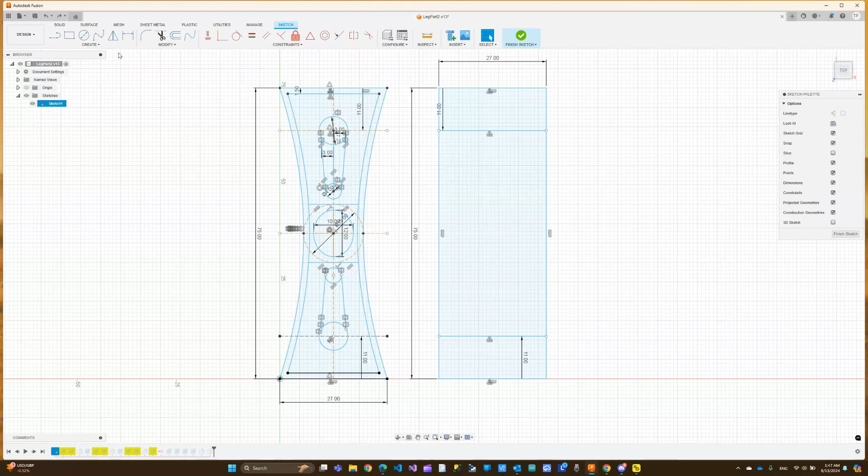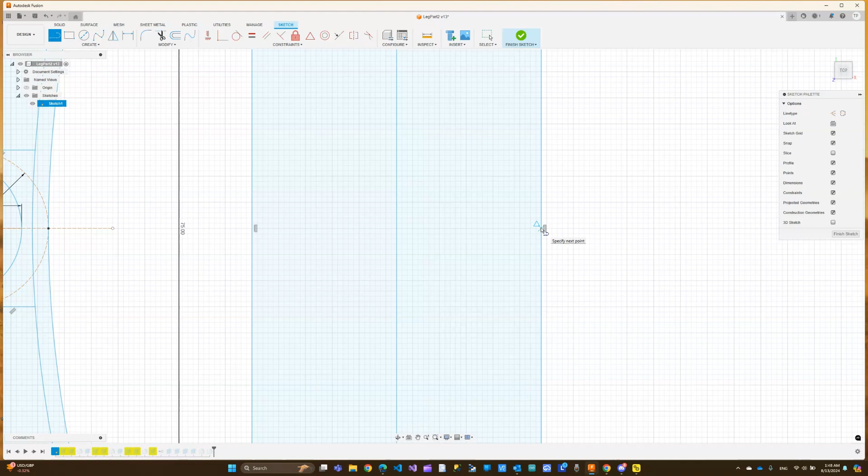So I'm going to get a line and find the middle from here to down. When you go over the line—let me zoom in so you can see better—when you see that triangle show up, that means this is the middle. I'm going to click here and drag it across, and as you can see, I am keeping the 90-degree angle to the other middle.

Now I can go ahead and delete my sides. All these additional lines that we just added are going to be construction lines. I'm going to highlight all these, holding control on my keyboard, and select all of them except the original one for the rectangle, and choose construction line from here. So now these are construction lines. I can use them for reference only, and I don't really need them to be part of my sketch.

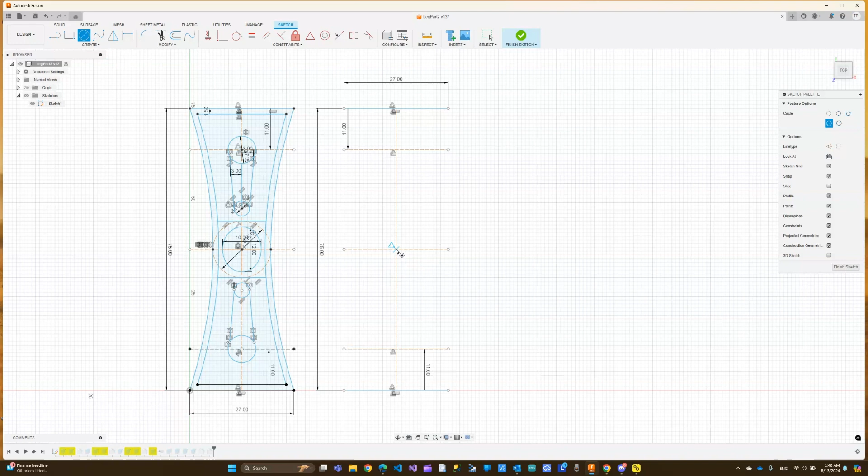Now to the next piece, we are going to add a circle right here in the middle, and this will be a 15 diameter. Now, this circle is also a construction line, so I'm going to highlight this as construction because I only need it to connect these two parts.

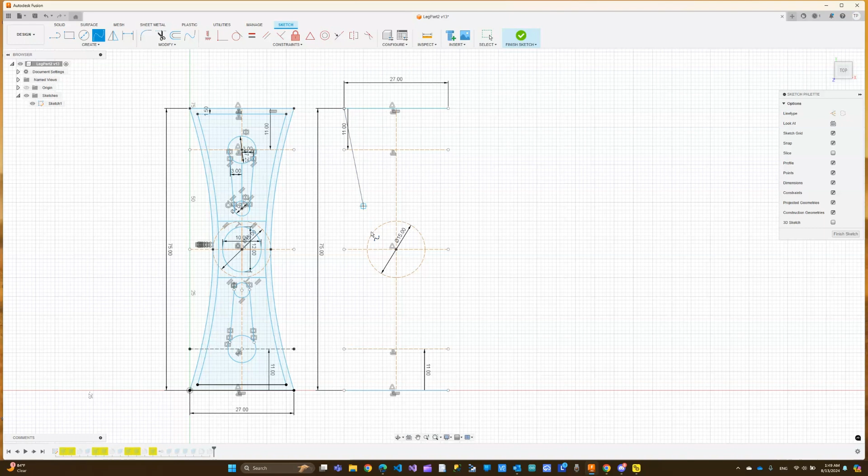Now I'm going to get the spline tools, and here I'm going to start from the top, hit the circle in the middle here in the cross, and go down to the bottom and click OK or click Enter. Now I need another spline from over here, hit the circle, then go to the end. Click OK for that. Now we will offset the entire shape.

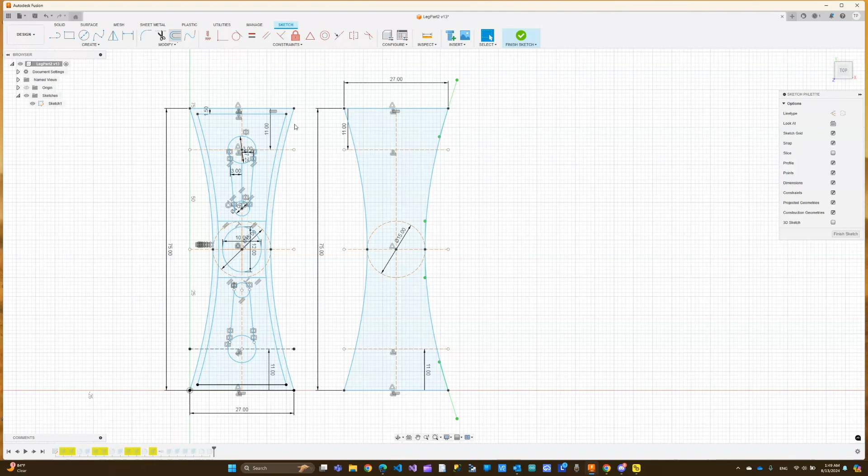So I'm going to control-click offset, and then I will select the whole thing. And now I can do 1.5 to the inside, so we will want to offset to the inside of our shape. Click OK, and that's what we should end up with.

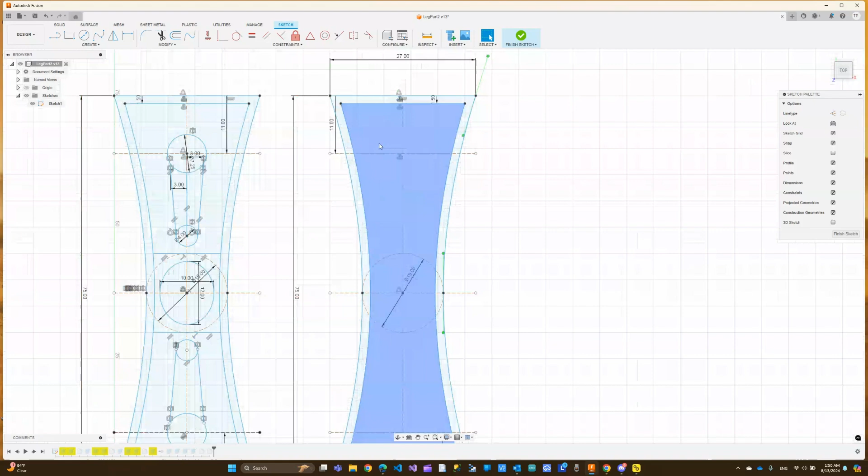Now here we will zoom in a little bit, and I'm going to add a circle over here, and this circle is going to be 7.25. This diameter is very important that you get it right because this is going to be for the servo head, and that's where the servo is going to fit in.

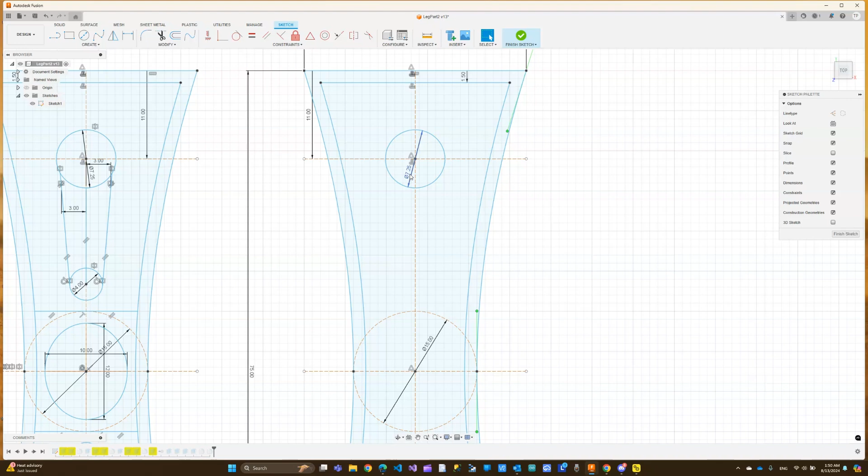So now I'm going to click OK, and you can see here from the circle, from the bottom line, I'm going to get a line. This is also going to be a construction line, and I'm going to take it from here all the way down, and go down by 12.

So here is my other point, and this is a construction line because I want another circle, and I will do the center of that circle towards the end of that 12-point line, and this circle is going to be 4.

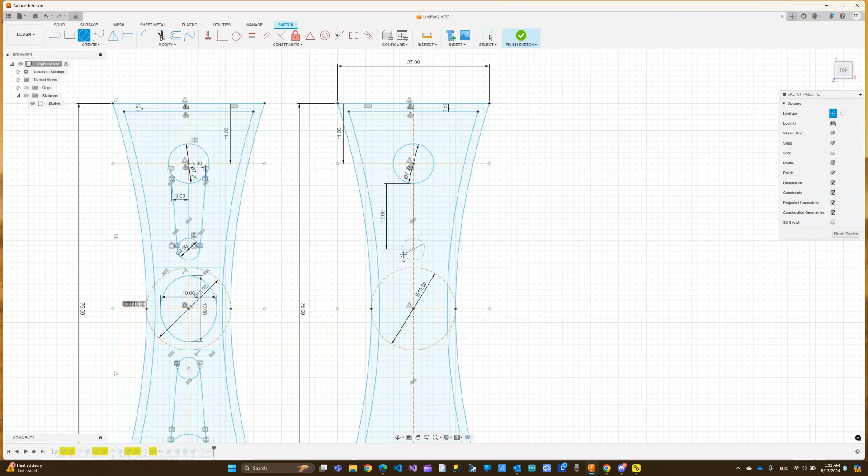So this is not a construction, so I'm going to highlight this and make it a regular line. Let me just undo that. And that is a regular circle. So by clicking that construction, we will undo it that way.

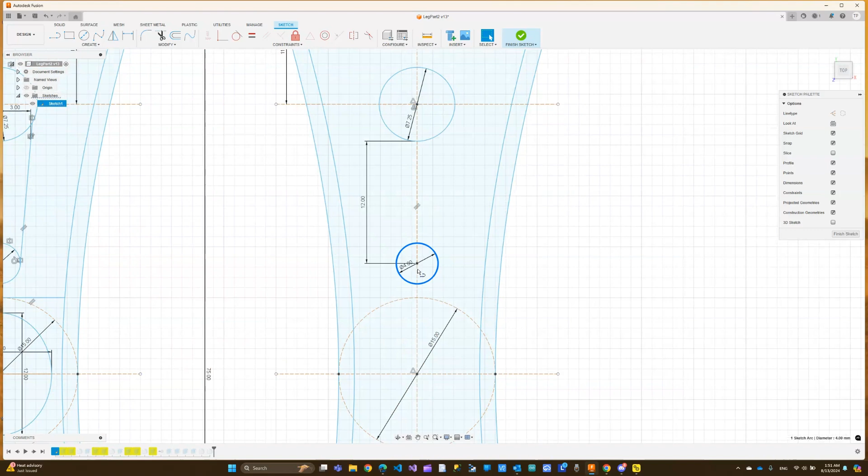Now we need one more thing here. So we have our 4. What I'm going to do, I need a line first that goes from the middle here and goes across, and let's touch here—that's not a problem. And then another line that goes from here to over here.

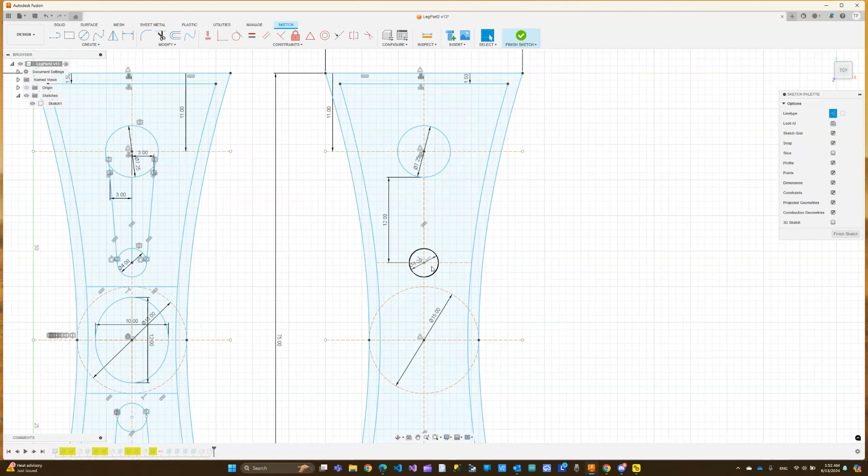By the way, these lines can be constructions because I don't really need them for the purpose of my drawing here, so the sketch doesn't really need them—this is just construction lines. And same thing over here, I'm going to add another construction line, and this one is going to be 3. Another one over here, and that is going to be 3.

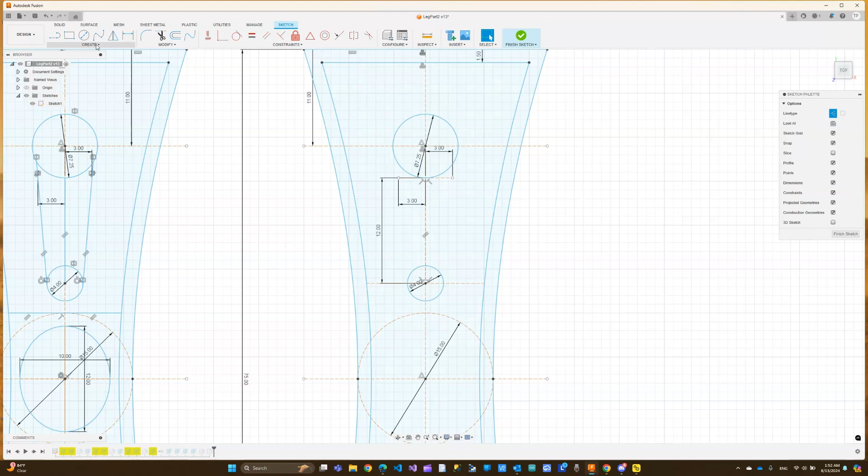So what I'm trying to draw is that servo attachment, and I want a nice hole or engraving in the material for that servo attachment. Now we are going to grab a line, let me zoom in a little bit more, and we will go from here all the way to over here.

This line is not a construction. Let me make another one. I will remove the construction in a second. Let me select this line and say this is not a construction line. This other one here is also not a construction line.

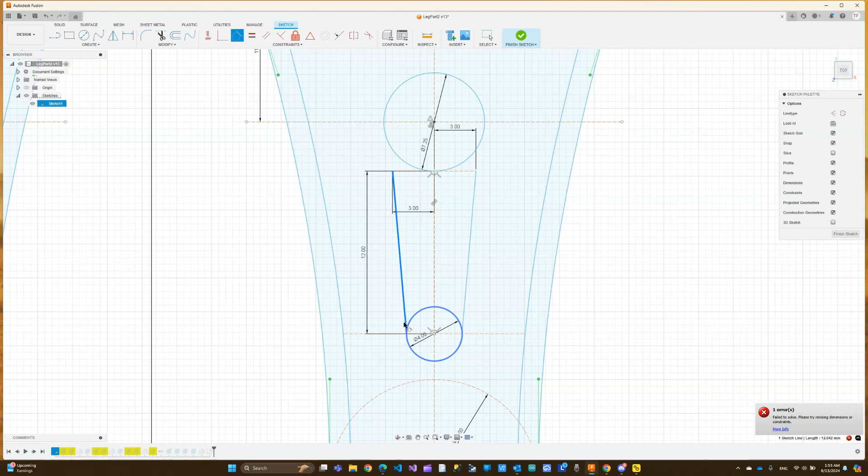Now we need to make sure these lines are tangent. See here, under constraints we have this tangent, we're going to select that, then select our circle and our line over here, and that should apply. I believe it's complaining just because it's already constrained correctly, so we don't need to do that. Let me skip out of that.

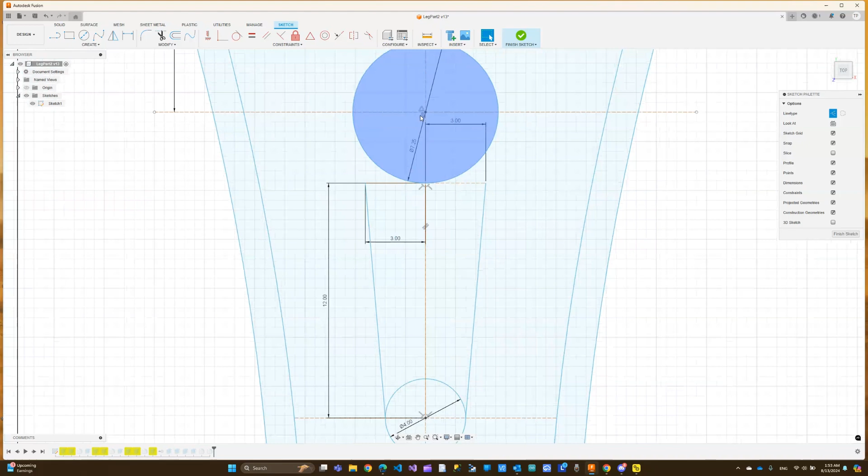What I really want to do here is get another line. We'll start here and go in parallel. You see this parallel signal showing up. We're going to keep that in parallel, and then we will touch our top circle over here. Make sure that is parallel. We will do another line over here.

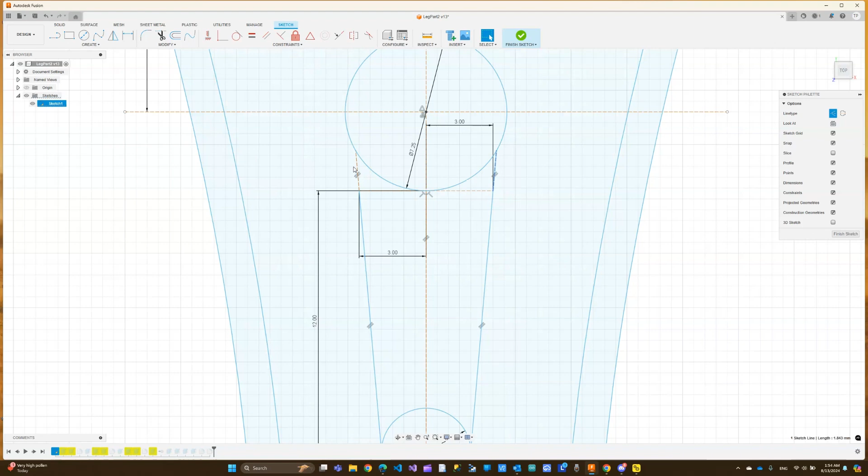These are also not constructions, so I need to undo the construction thing. You can see here, keep the parallel signal, and if I go away the parallel signal goes away. So here's what I want: this parallel signal, and then we will touch this circle. Now let me select this line, hold my control key on the keyboard, select the other line, and remove the construction here. So now I'm done with the attachment here.

I'm going to mirror this section to the other side, so we can also learn how to mirror things. I think I've done a video specific just for mirror, but here is the mirror tool. I'm going to click that, and now I'm going to select what I want to mirror.

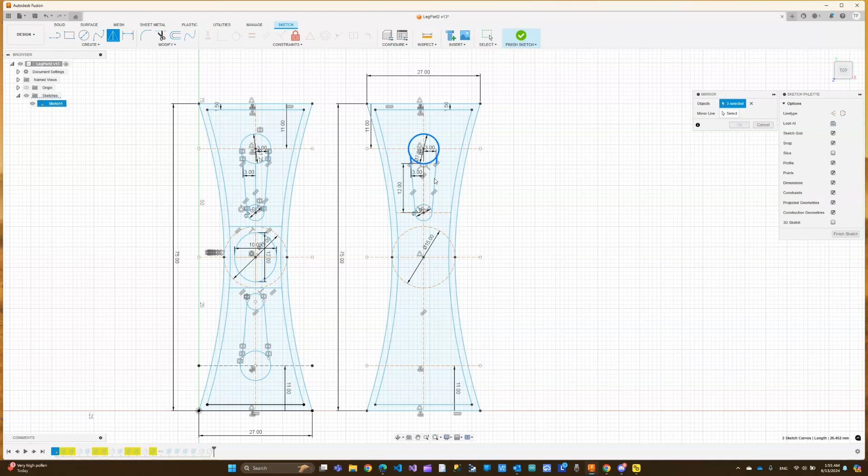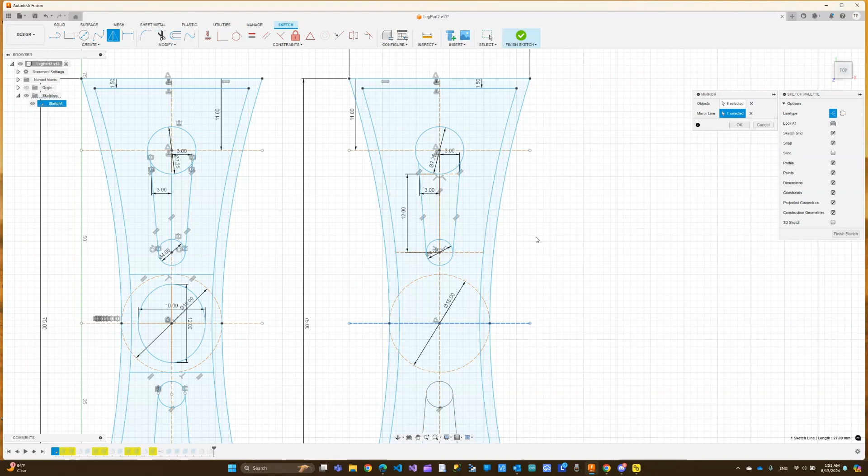So I want to mirror this, this, this, and this over here. Now I will choose my axis, so I'm going to flip here under the mirror tool. I'm going to mirror line, select that, and mirror over this midpoint. We'll do that and click OK. As you can see here, we have the same shape on the other side.

The final piece I want to do is this piece in the middle. So let's go under create and do an ellipse. We're going to choose that and start from the center. We will go up by, let me see here, I believe 12 - yeah, I'm looking at the sketch here, it is 12 over here, so we need to go up by 12.

Let's do that, and then we will go out. Let's see, we will go out by 10. Again, this is not a construction, so let me remove that. You can see here, I got mine here, it is 12 by 10, this ellipse here. We are done with the sketch, so I'm going to click Finish Sketch.

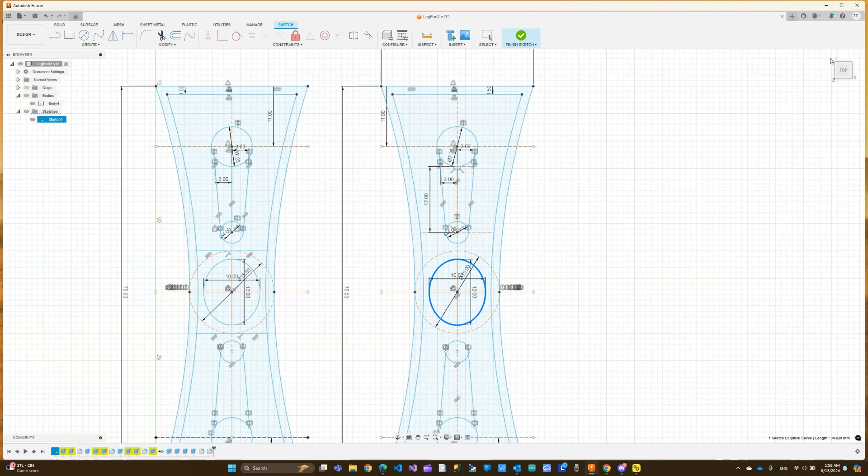Over here, when everything is done, we will go to the home position. Let me show my sketch here, and I'm going to zoom out a little bit. Let me just deselect that, and now I'm going to start to extrude.

So let's go ahead and extrude. We will extrude everything first, so I'm going to select that. We want to extrude these as well, and let's extrude these. You don't want to extrude these holes because these holes will always be hole through, right? So let's extrude everything by 3, that is going up by 3 for everything.

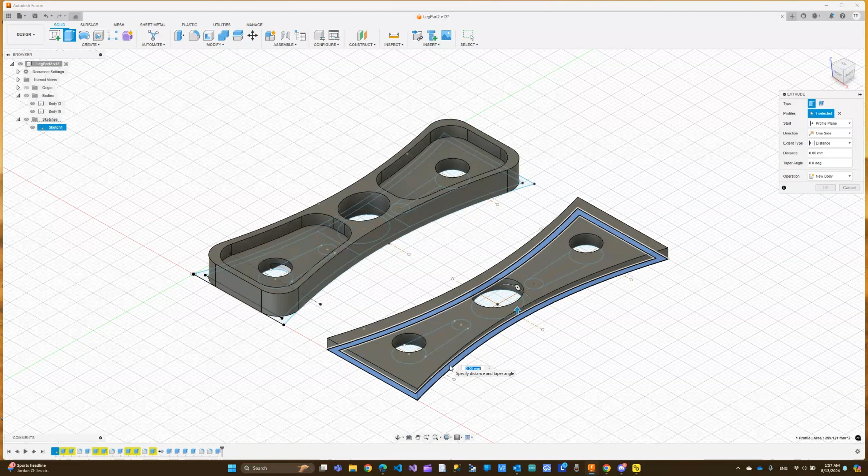Now let's go ahead and extrude the rest of it, just the outer layer, by 6. It's going to try to cut, but here we are going to join and click OK.

Now we have a couple more things to do. First we want to extrude these. If I rotate this shape, let me show you really quick - if I rotate, you see here I have these holes, here I do not. Let me hide the sketch so you can see this is the holes I'm talking about. So now we are going to extrude these in to cut through the shape. Let me re-show my sketch.

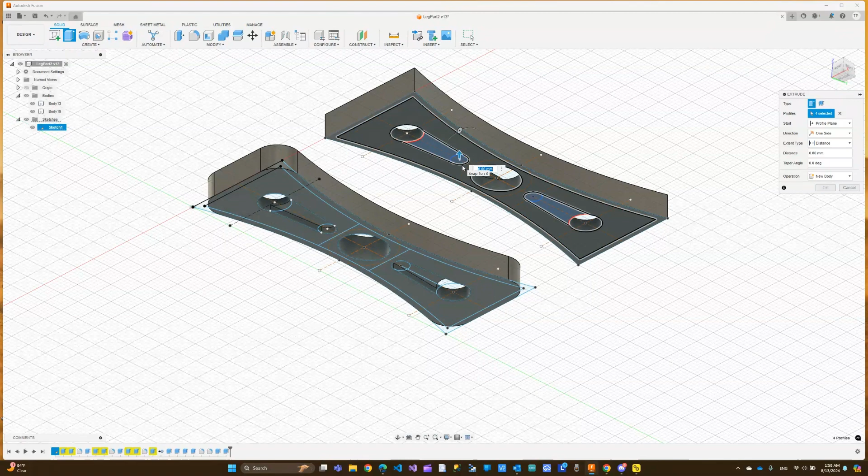I'm going to click extrude. Now I'm going to select this and this over here, also that and that, and we will extrude this inside by 1.5. This will cut and that is perfect. So I'm going to click OK and that is done. Let me also remove my sketch - as you can see, we got the holes in there. That's perfect. Now let's go back to the home position.

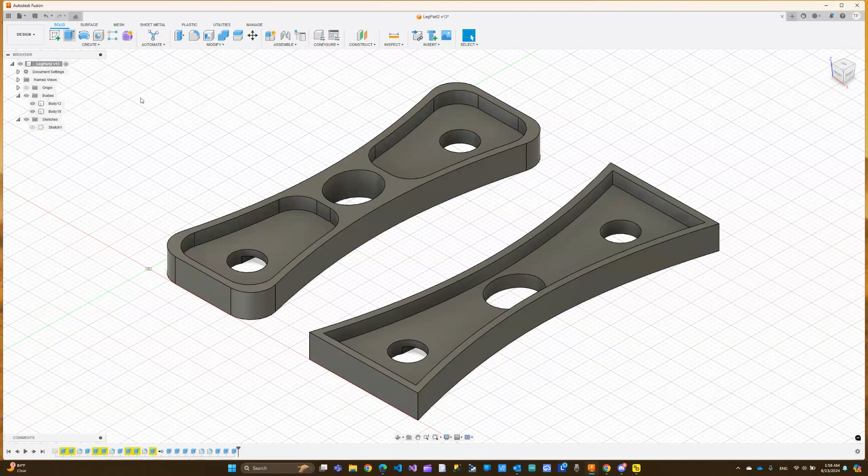And there's one more thing to extrude. So let me click extrude and we need to extrude the outer layer of the circle. I think I forgot something on the sketch really quick. So let me click escape here. I'm going to go back to my sketch and show you what I forgot. So there is a line that is just outside of the circle that I forgot to put. Let's go ahead and put that line in there.

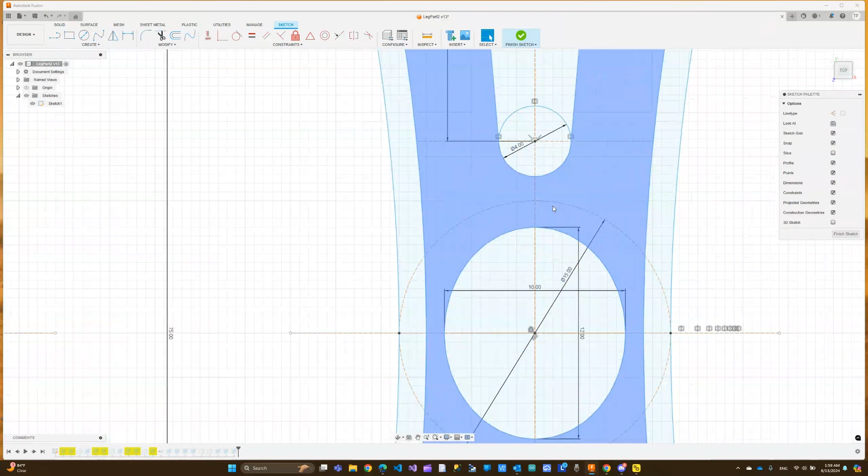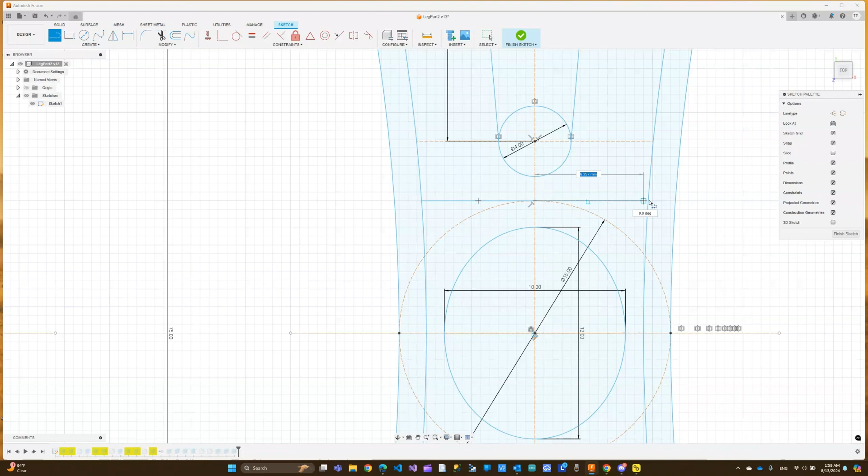You can see this construction circle that we did earlier. Now we're just going to do a line across. So we're going to start from here. We're going to keep it in a 90-degree angle and then touch point over here. We are going to do another line from here to here. And same thing will apply to this side. So just a line, keep it straight, and another line over here. Keep it straight. That looks good.

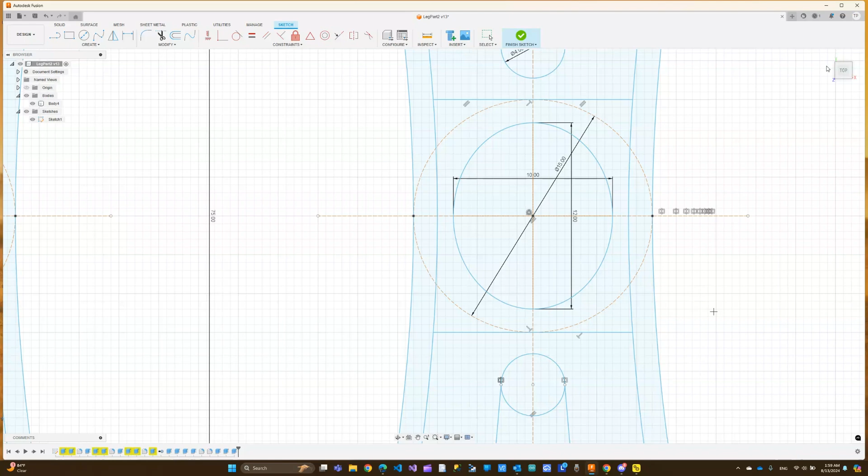Now I'm going to click Finish Sketch. And now we should be able to do what I wanted it to do. See, I'm not going to edit this video. I want you to see, because again, we're learning together and I want you to learn how to fix mistakes, or if you forget something, how you go back and add it. So now let's go ahead and do the extrude that I wanted it to do. And now I should be able to get the shape I want.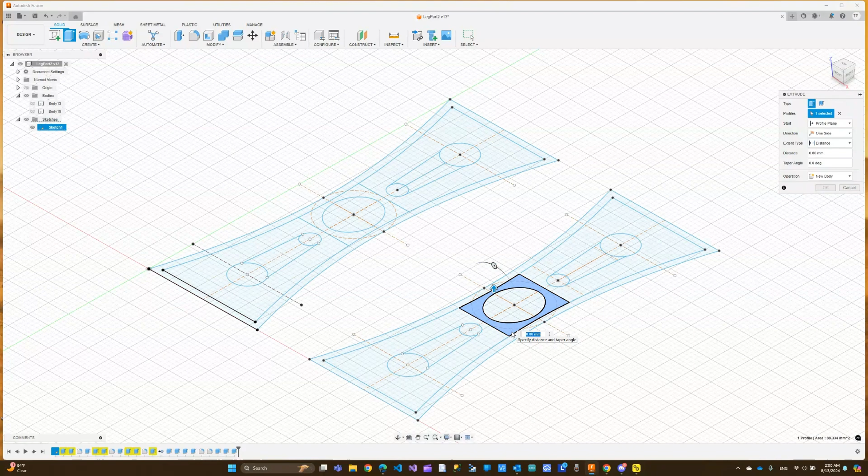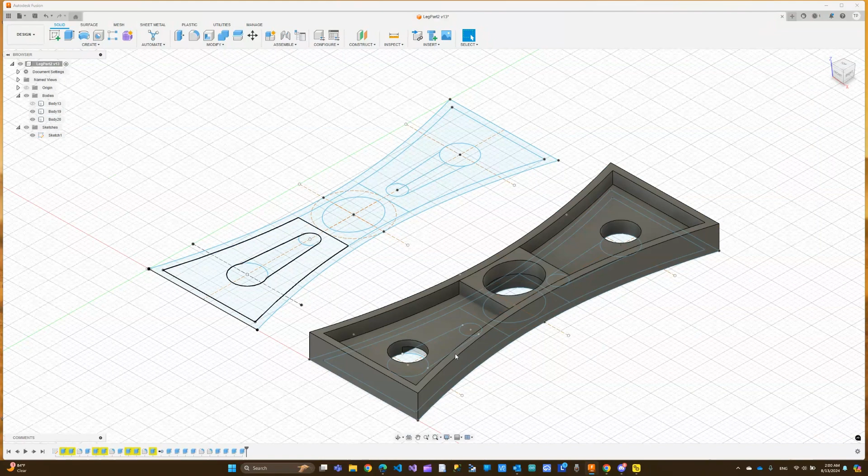I'm going to hide the body for a second and I'm going to show my sketches. And this is the piece I want to extrude over here that I just added when I added the line. I'm going to extrude this by 6. It's going to try to make a new body, which is fine. Also, you can do a join. That's also fine. But let me go ahead and click OK. Now, if I show the other body, you can see it looks like this. And I'm going to show my original body here as well. Now, let me hide the sketch so it's cleaner.

And the final touch, which is this fillet. So I'm going to click fillet and then I'm choosing all the corners. So that's going to apply to every single corner over here, over here. You get the idea. I'm just applying the fillet, and let me just zoom out a little bit so I can get this corner. And there it is. And now I'm gonna do 5.

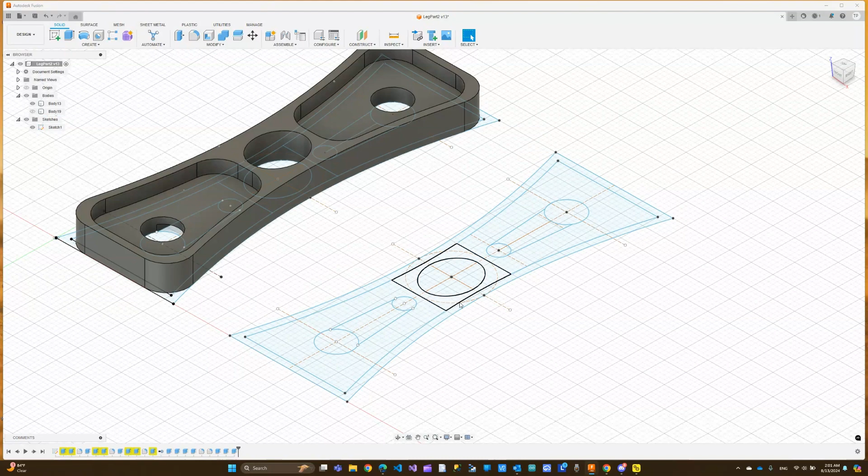So I did okay. There's a quick mistake here I made. Let me escape that. Let me undo one more thing. The reason the fillet did not work the way I want it is because this I did as a new body. I should do a join. So let me just hide the body one more time. Show the sketch. And again, here we're learning. That's the goal. I'm gonna highlight this one more time.

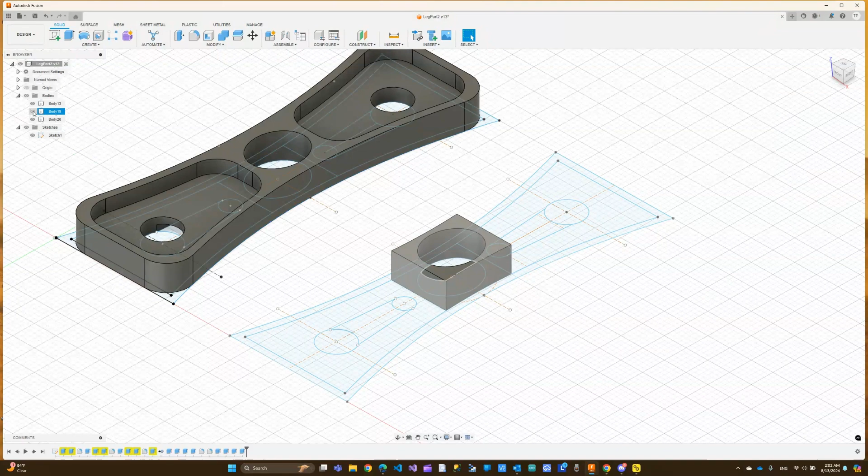Extrude, and this time, instead of doing a new body, we'll do join, and we will do 6. And there you have it. So now that should do better. Let me go ahead and show my body again. And then let's go to the home position here. And I'm going to try the fillet one more time.

Sorry, this video is getting a little bit longer because I'm making a couple of mistakes, but hopefully that helps you to learn. And I'm learning here as well. That's the goal of this course.

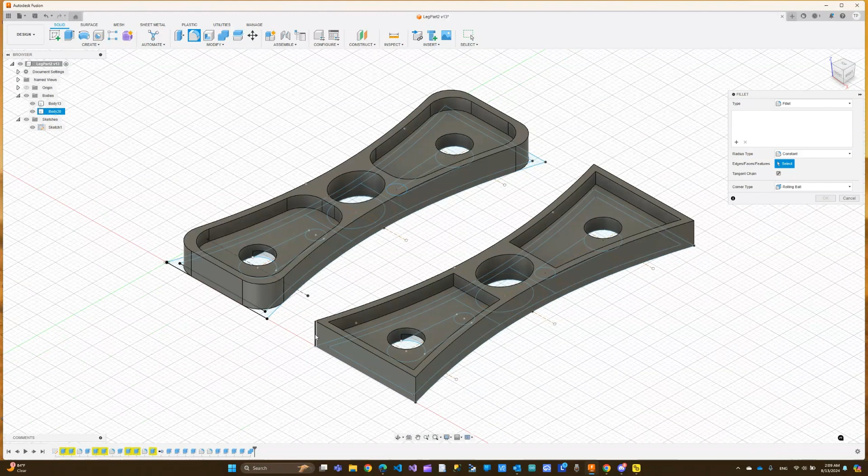Now I'm back in this home position. There's one more last thing I want to do here. You can see this new body is not really joined or attached to the outer body. So I'm going to select join here, or combine, and I'm going to click that. I will choose this body and this outer body and click OK. This will make this a single body, and that will fix my fillet problem. So now I'm going to click fillet, and that should work this time. So make sure they are a single body.

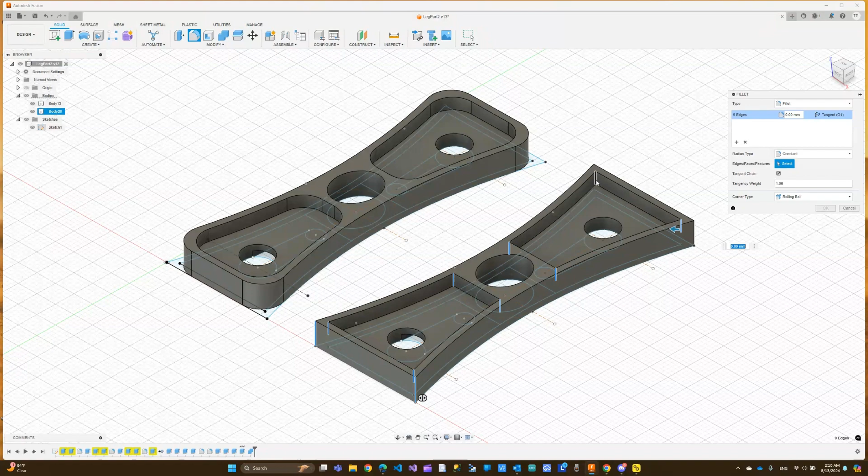Now let's go to select these, and let me do that. And here are all these corners that I'm trying to choose. And by the way, we're almost done here. Hopefully this works. And I know this video is getting a little bit longer. So let's do that. Let's click 5, and there you have it.

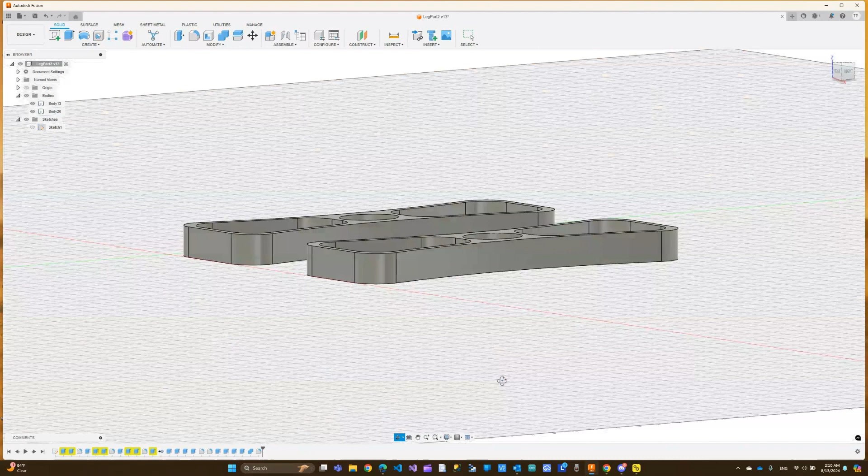So you can see that is my part. That's how it ended up looking. Let me hide the sketch, and you can see now we have an identical part. Let me orbit around this, and here's how it looks from the bottom. So this is it for this video. This is going to be the second part of the leg. I will have that showing in the thumbnail picture if you want to see how it looks.